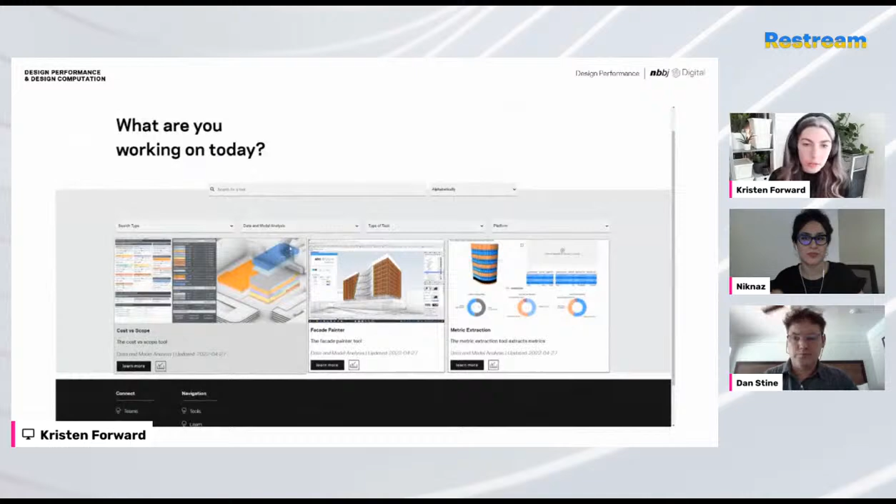So we worked with our UI/UX designer and our full stack developer to develop this new version of our toolkit. It has nice features for searching and filtering, and it's a really easy process to upload a tool, and you can tag certain things so it's categorized properly.

So we really wanted to make this fun and easy to use, a place that more than just the design computation specialists would want to go to. So we tie it to people as much as possible by giving people profiles, letting them like and comment on the tools, and also tying it back to our internal blogging system.

So we have some really cool success stories of buildings that use computation to achieve some level of performance aspect. I'll go through a few, and then I'll talk about how we're actually using computation and performance tools more often on project work. The Hangzhou Stadium is a great case study of using computation to optimize the building structure and then ultimately reduce the amount of material needed.

This work happened back when Grasshopper was just being newly adopted into practice. Computation specialists like Nathan Miller were pioneering their use on design teams. The really cool thing about this project was the cross-disciplinary aspect of the workflow.

Rhino and Grasshopper were translated into Revit, and then that was exported to AutoCAD for the engineers to run analyses, and those results were fed back into Grasshopper. This was back when we didn't have Rhino inside Revit or other really tight plugins to help us work with these workflows. So that integration between the disciplines was ultimately what enabled this ambitious structure to be optimized and ultimately realized.

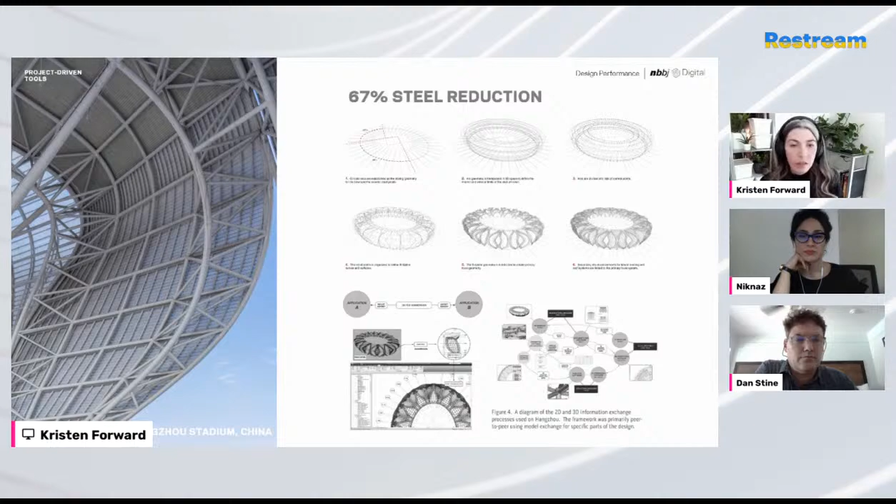This one's an example of a project that wanted to use analysis to enhance employees' experience and overall productivity. The client wanted to ensure that their employees had a really high number of spontaneous interactions with each other, which is proving to increase innovation in a company.

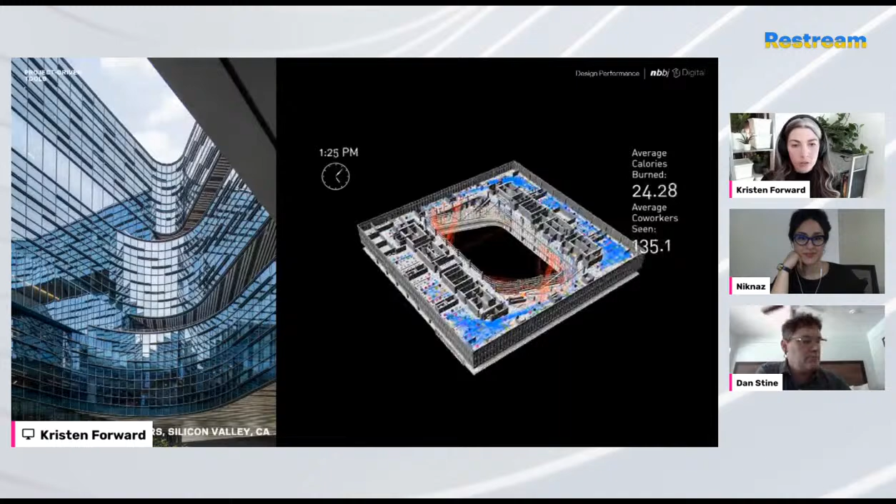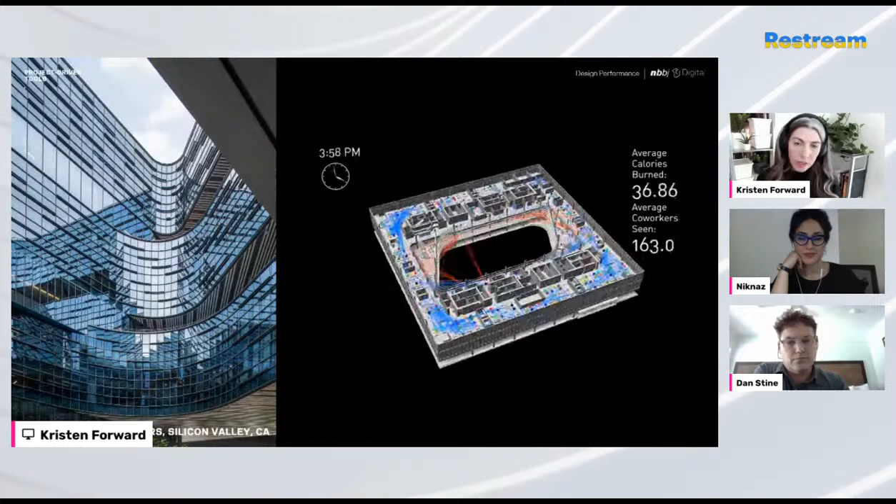So the simulation used an in-house Grasshopper plugin to study how much potential there was for visual connections between employees in a day. The blue is on the same floor, and the red lines are between different floors. By comparing multiple studies, ultimately the project's teams were able to arrive at a design that maximized its potential while also balancing other design aspects.

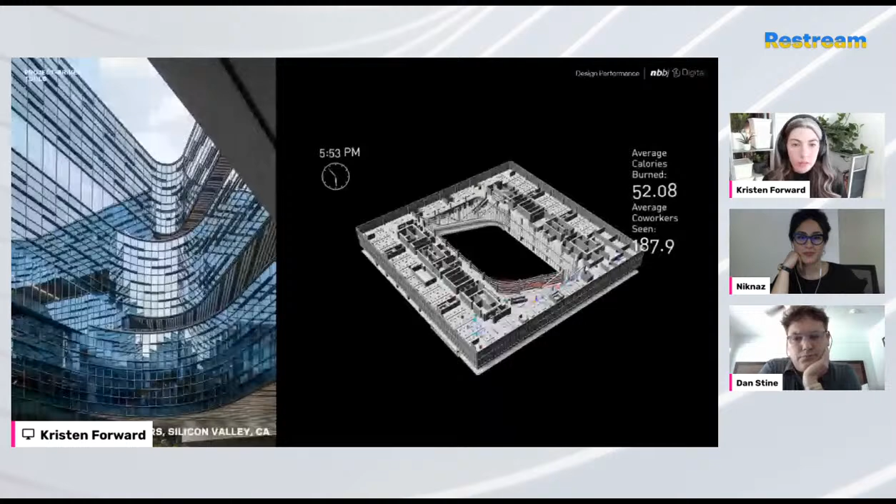The Spheres is a great example of how we can do some really complex environmental analysis to accommodate for both plants and humans. This one studied a combination of natural and indoor lighting and controls for both people and plant life. Plants inside the Spheres are from all over the world, and they have super unique requirements to thrive.

The team worked with external scientists and our internal lighting consultants to understand the calculations for all the usable light from the sun and different lighting fixtures. They made a custom tool in Grasshopper that simplified the calculation, and it allowed the lighting team to test different lighting schemes.

So I wanted to show these projects and talk a bit about them because they're certainly worth mentioning. Some of our most innovative tools and workflows have come out of designing them, but they just represent a small fraction of what we're doing at NBBJ.

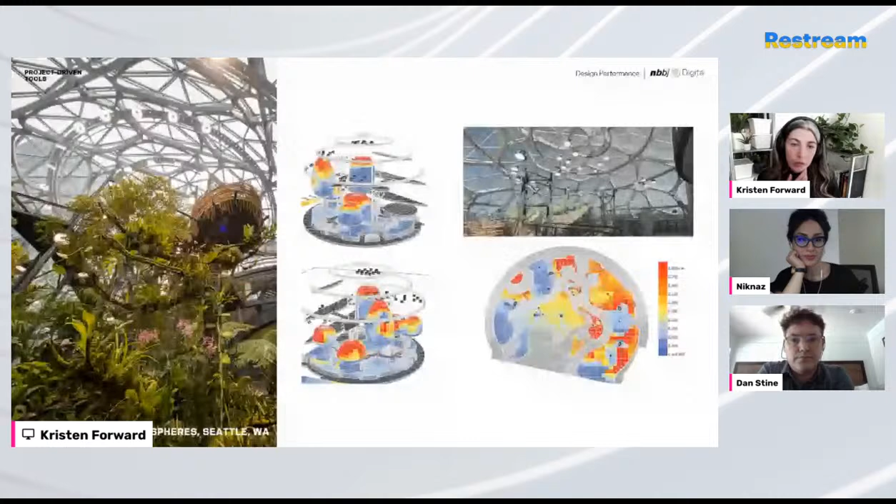They're kind of on that far end of the long tail that Daniel Davis talked about recently, meaning what we're seeing in the firm with these big projects is what the best and brightest designers and specialists have worked on. The real collective challenge in our practice lies in that fat middle, the area that's defined by more projects that have more practical design challenges and certainly more financial constraints.

Our teams are integrating performance into designs every day, and often designers are performing analyses. These are just a small snippet of examples from across the board. And they're sharing this work with the rest of the company through a number of channels, and definitely our toolkit.

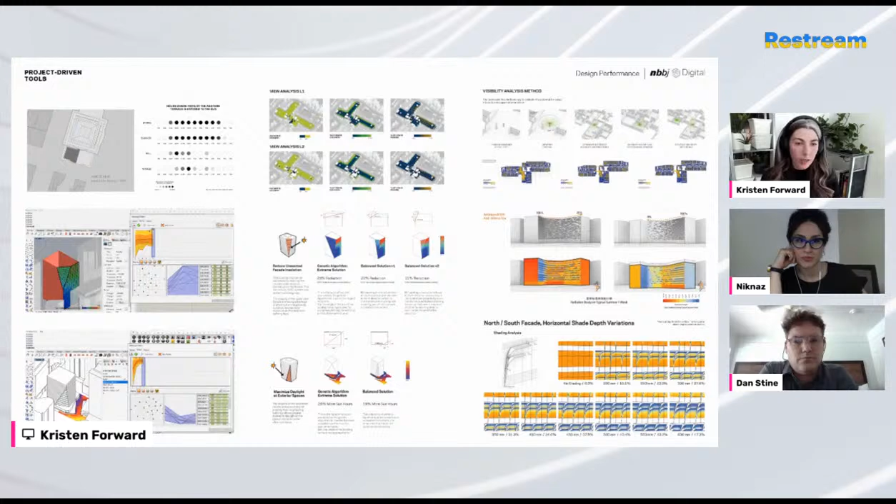And we're finding challenges in using these tools on projects, and then they're coming up with ideas and processes to make these better. So the role that I have, bridging between the computation team that's so project-embedded and the overall performance group that's really goal-oriented, is to track and gather this feedback and ideas, and then work to solve the problems at a more infrastructural and institutional level in the company.

When we think about the challenges of implementing performance tools in general, they can be categorized into three areas. The complexity of performance tools, as they tend to have really significant learning curves and they often lack seamless integration with our commonly used software.

The intricacy of interpreting analytical results can dissipate designers' abilities to adequately utilize data to make informed decisions. And then there's the knowledge gap between our performance design experts and non-experts. This will slow the progression of design actions because there's not enough data to understand the design goals, understand the metrics, and especially all the tools that are available for them.

So with these challenges in mind, we've developed a guiding approach that has both computational and strategic methods for enabling performance design in our practice. This is from the perspective of a team that leverages existing tools, creates custom tools, and also educates people on using those tools.

It starts with implementing this in work. It starts with who is implementing it. It starts with the processes that we commonly use and the projects that we're implementing performance on.

The first tier of the approach looks at accessibility and usability and the adoption of performance tools. We understand there are really diverse sets of needs across a large swath of stakeholders on design teams, so we've got to shift our thinking towards democratizing the capabilities beyond just specialists and approach these tools with accessibility, interface design, and control as top priorities.

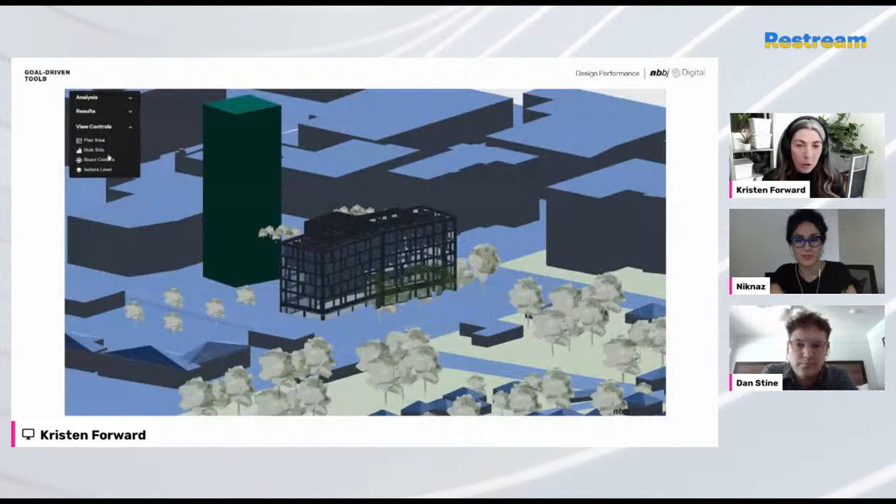So one of the tools is our view analysis tool. This tool is hosted on the web, but it integrates into our software that we use commonly, like Rhino and Revit. The UI/UX design of this was really important for the development. It's showing pretty easy to understand graphics. The idea behind it is that it tries to make this stuff more simple, and it also lets you export the data in a more consumable sense.

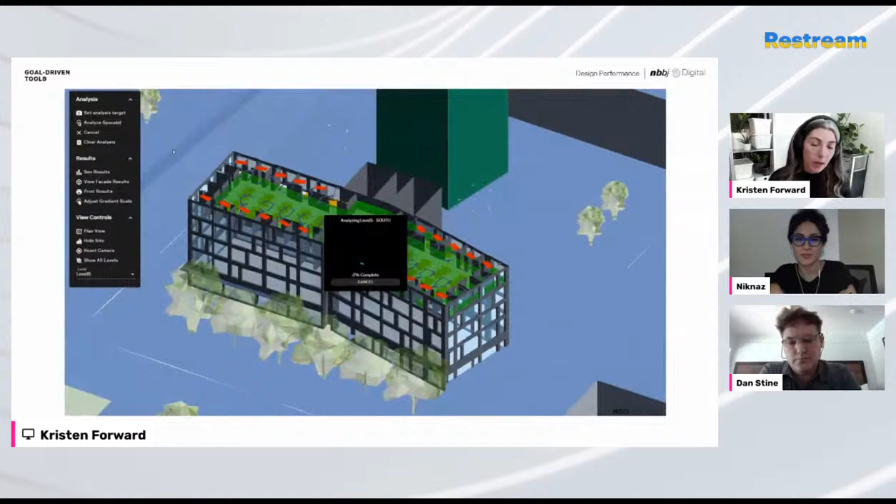So it links to evaluations like LEED and WELL, and it also has graphic talking points for what the data is showing. Our daylighting tool is like this too. It has custom templates that we provide when you export the information, so it'll empower designers to more competently discuss their outcomes.

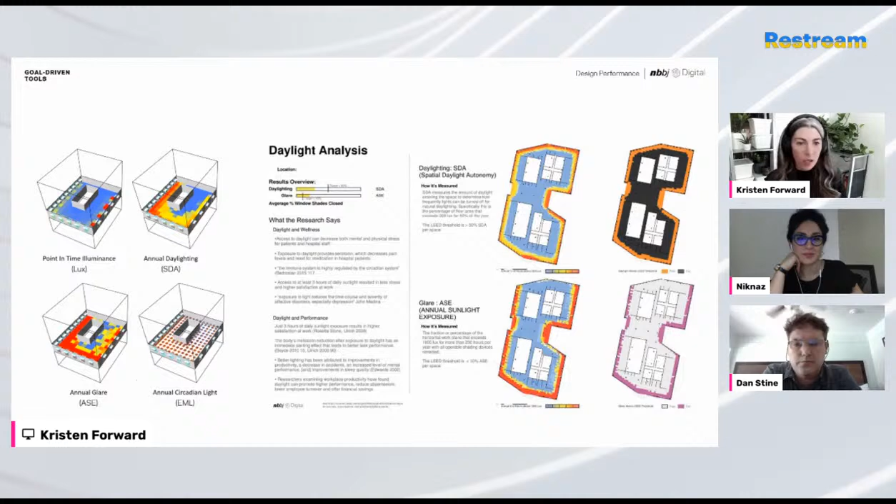This is a tool that's part of the Applied Science Toolkit as well. It's based in Rhino and Grasshopper. We know that most of our designers work in there, so we wanted to create something that just plugs right into their workflow. This tool specifically is a wrapper on the Climate Studio plugins and provides both a parametric option as well as something that lets you import layers from Rhino to run different analyses related to daylight.

That's a summary of some of the tools and workflows, but I want to talk really quickly about what we're planning to go on to from here. The innovation at NBBJ is really driven by the individuals in the company, and what we focus on is mainly a product of the interest of our team members. That said, we try to facilitate the innovation by providing opportunities for us to come together and brainstorm new ideas.

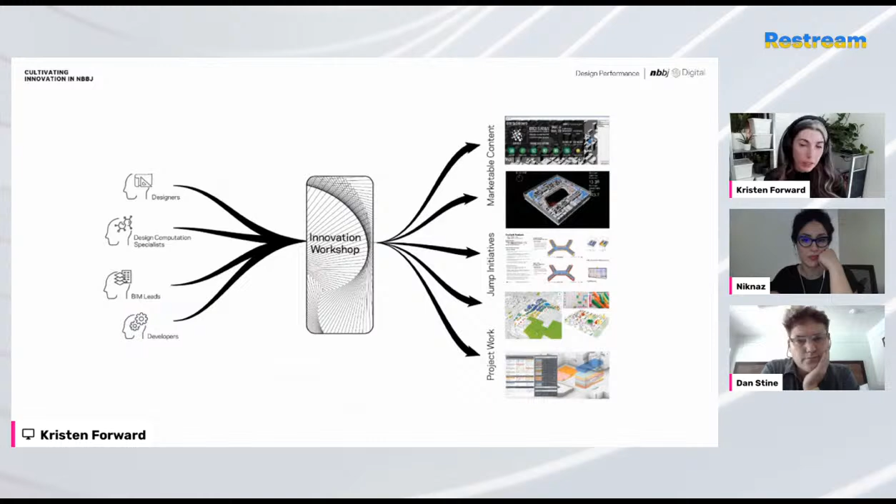In the most celebratory sense, we do this in the form of hackathons. They're open to anyone who's interested or has an idea and the availability to take three days out of their life and quickly develop a proof of concept. Some of our coolest new tools have come from these events.

A lot of them focus on performance design too. So ideas range from mobile apps that give users access to indoor environmental data in the workplace, to the innovation of our in-house training travel distance analysis plugin, to exploring visual acuity in virtual reality, and also a tool that asks how productive a space can be by measuring an equal balance between prospect and refuge areas.

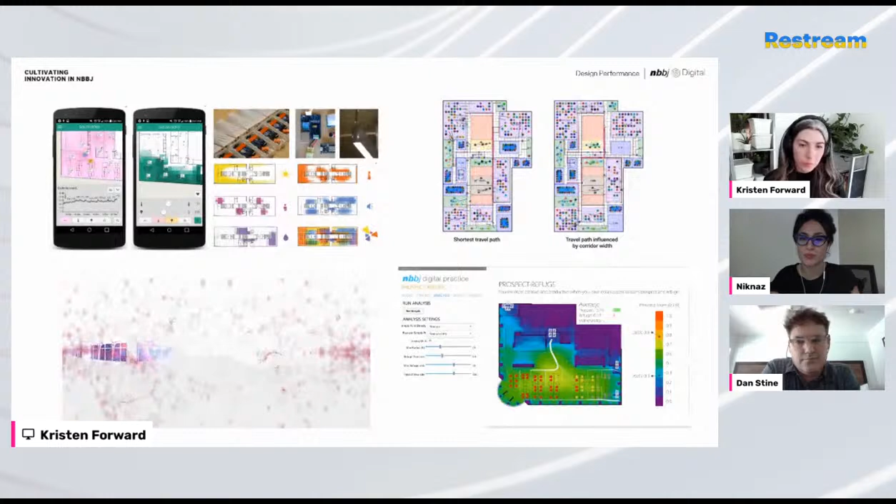We also try to have a presence in the industry, like contributing to advancing innovation in external hackathons and conferences. A handful of our team members were focused on automating analysis model extraction at last year's AEC-Tech hackathon. They were developing a proof of concept for extracting geometry at any design phase and then having it ready for performance analysis, so the idea was to tighten the design-performance feedback cycle.

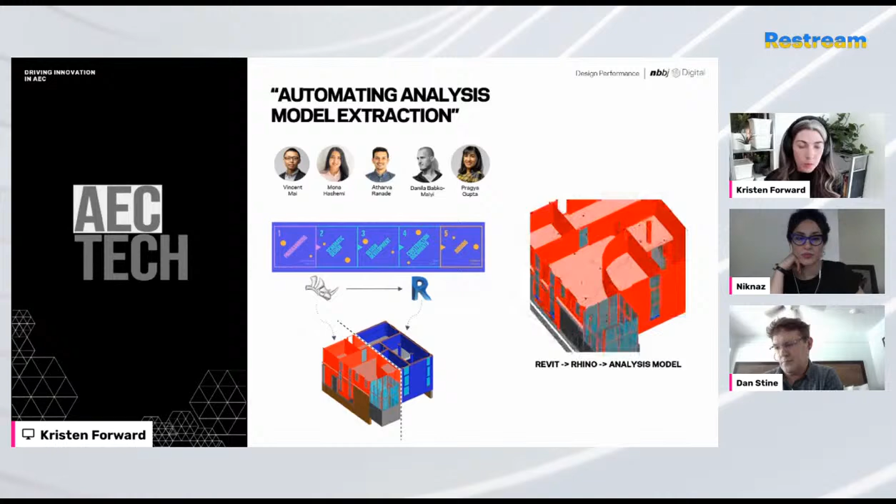Apart from contributing to collective gatherings, events, or discussions in the industry, we want to contribute in more of a form of technology. We're working on an external release of the Zero Guide tool, and the idea is to provide more useful tools that others can benefit from, and hope that they help foster communication and have an impact in enabling carbon-conscious design work in the industry. I hope personally that we can do more of these, prepare more tools for external release in the future. Thanks for listening.

Thank you so much, Kristen. This was amazing, so extremely useful tools. Just a quick question, and then the Q&A section will be at the end.

So these tools are all in-house, and then all the offices, all NBBJ offices, have access to use them. Is that right? Just internally? Yeah, a lot of the tools are ones that we custom make ourselves. I mean, we're definitely using tools that exist in the industry as well, but we're, as a team, kind of vetting what is the most useful.

Anyone is really welcome to use what they find the most useful, but as a whole, we're either using tools that exist and creating wrappers on them to make them more relative to our workflows, or we're creating our own custom tools that we don't see in the industry that we think are most relevant to us.

That's amazing that you have resources and people to work on these tools. It is, yeah, that's great. Awesome, thank you so much.

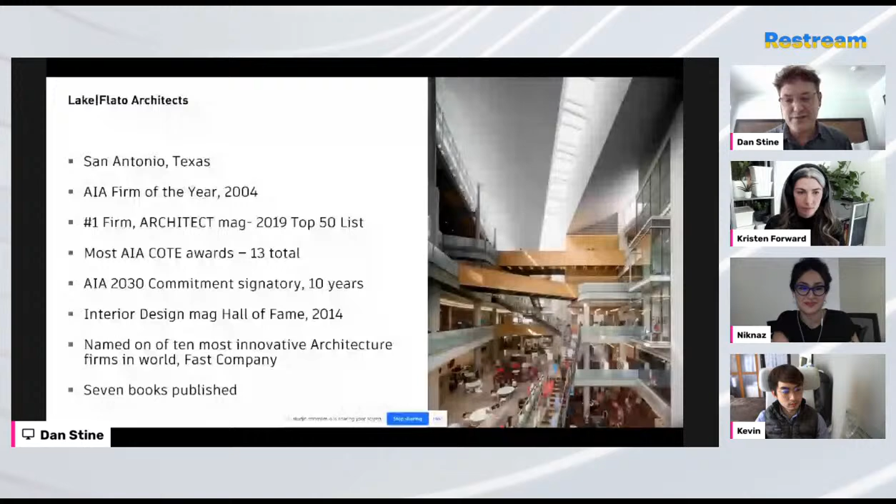We have 5 studios in our office. About half of our work is national and the rest regional in Texas.

And then, like NBBJ, we also signed this COP26 communique. Part of being deliberate about design technology and building performance in general is having an organization and a strategy, and communicating it throughout the firm.

We have a design performance action plan, or also known as a sustainability action plan, that helps guide and influence project-related decisions. And then when it comes to design technology, my title is Director of Design Technology, and it's actually a new position that's been created.

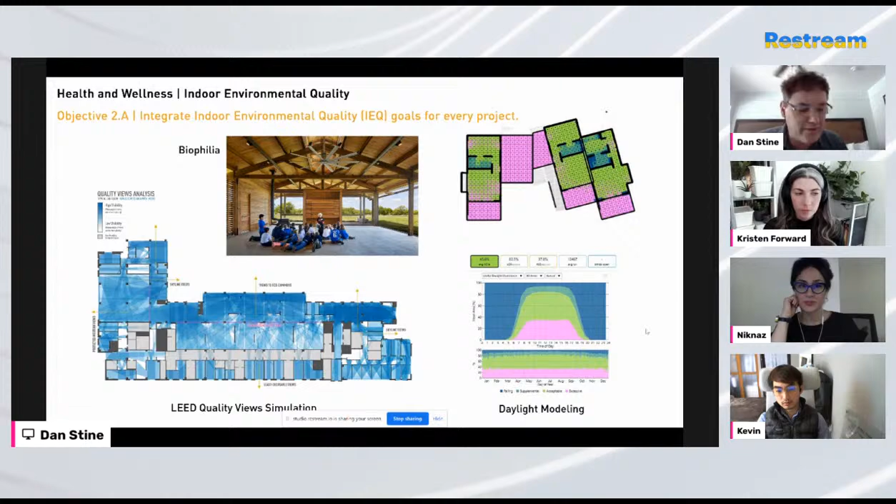Climate Studio, for example, has a great Revit plugin now where you can export a Revit model directly into Rhino and do some really great things with Climate Studio.

Another workflow we use to maintain that single source of truth, and also allow design teams to do some of their own analysis, is for early energy modeling: we use Autodesk Revit and Autodesk Insight, which is a cloud-based tool that uses DOE 2.2.

It's ASHRAE 140 validated. It creates perimeter and core thermal zoning as prescribed in ASHRAE 90.1 Appendix G.

On the right, you can see Autodesk has this great tool where they worked with NREL, and you can get results similar to NREL's PV Watts website in less than 15 minutes on any project in Revit. So I always say, even if a project isn't necessarily calling for PV, we should be running this number and sharing it with the client.

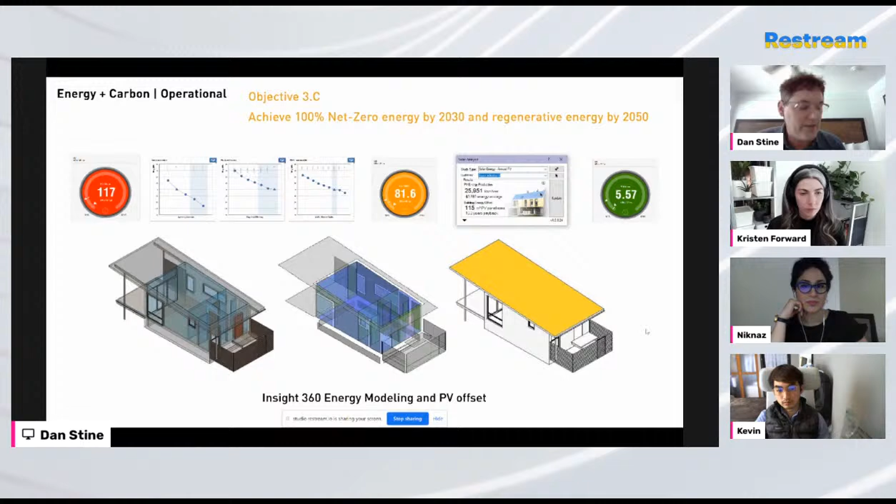The AIA Code of Ethics, of course, talks about members taking time to communicate and educate environmental issues with the client.

We also, again, this single source of truth, we're using Tally, which is part of Building Transparency now, and EC3, to do embodied carbon analysis and study global warming potential between different wall types, different infrastructures. We have a great report from our internal research group that is a summation of a report on embodied carbon on our website. If you go to LakeFlato.com and the investigations page, you'll see a really interesting document there.

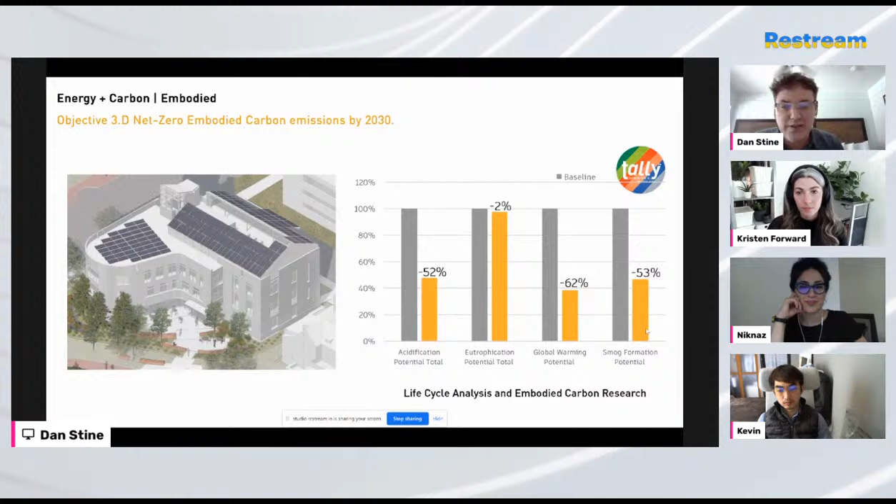Recently, I worked with one of our mechanical engineers in Austin, Texas, on a project that's in San Antonio, and basically we're studying the point of diminishing returns in a hot, humid climate for roof and wall thermal mass and thermal resistance values. And then we also took that same project and dropped it into 4 other climate zones.

Again, about being deliberate and developing workflows, we have this workflow on operational energy. We have another one on embodied carbon as well, how we would do each of these tasks at different phases during a project. We also have one for daylighting analysis.

I won't read through all that for you, but you can see we start early and try to do it often. That's focusing on passive strategies early on before we start getting to active strategies and then ultimately renewables that would layer on top of that to try and get to zero as much as possible.

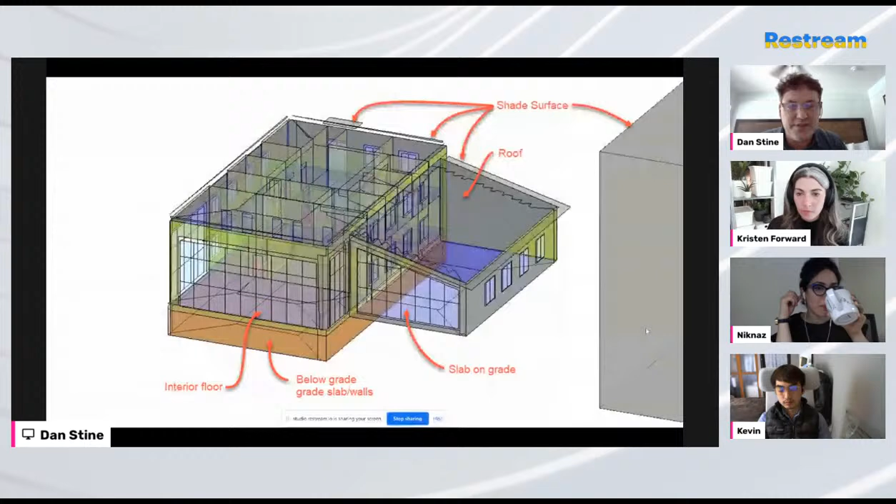This is just an example of the sophistication of the workflow when you have a Revit model, and the sloped roof section on the right is actually just massing. When you create an energy analysis model, it'll automatically convert all the planes into the correct surfaces. So that mass on the right, its bottom plane turned into a slab on grade for the energy analysis model, and the roof turned into a roof, but the overhangs turned into shade surfaces.

Just for validation purposes, we're always looking at comparing tools and workflows. I wrote a blog post on the Lake Flato website, Lake Flato's blog called The Dog Run, comparing Insight results with Climate Studio's ability to do energy modeling. Of course, Energy Plus and DOE 2.2 are very well vetted energy modeling engines. So same inputs should yield the same results, and that's what the blog post shows. They're both great tools, and they both produce accurate results.

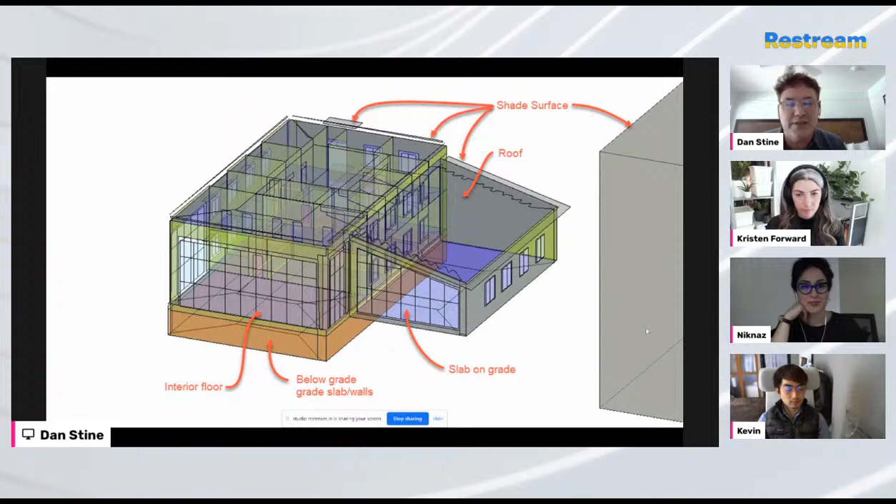But you can also take the early energy modeling workflow that involves Insight and DOE 2.2 and take it a bit further in our workflow within Revit before the mechanical engineer gets involved, or even potentially some overlap.

Here's a current project that we're working on in Montana. It's part of a ski resort, a multi-use facility with a gym and a retail area and a restaurant, and we're able to, within Revit, develop an accurate envelope with proper thermal resistance and thermal capacity or thermal mass, accurate internal loads, reasonably accurate HVAC using Revit's new system analysis feature.

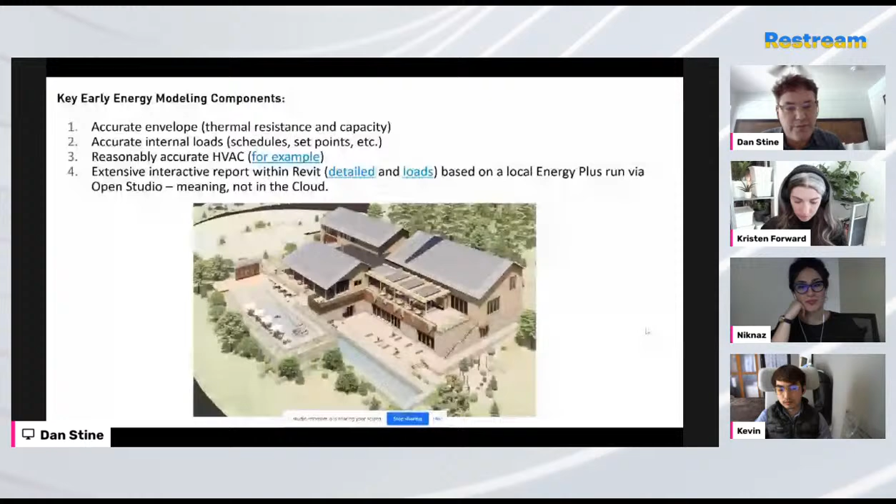So we can define a VRF system, a dedicated outside air system. The gym was defined as a rooftop unit system. And then it creates an extensive report that you can view directly in Revit with an EUI and all kinds of other metrics that are really quite interesting, psychrometric charts. Here's an example just to show you those.

Concepts: a highly accurate envelope, internal loads, and HVAC systems. So the envelope here is in the lower left where you see it says detailed. Within Revit's materials, you can actually develop an accurate wall material, one of the layers within a wall.

The little example on the right is actually from one of our passive house projects. This is a wall type developed in WUFI Passive, and this is just showing that you can develop the same exact level of detail in Revit. And of course, if you were to change the thickness of the material, the total thermal resistance and thermal mass change, which thermal mass is also really important and often overlooked in some of the competing tools. The little green arrows show the same R value of a 100.

This is actually more of an extreme example, like when I was talking about the point of diminishing returns, the R100 is pretty high. And then in the upper right, when we're working early in the process, as I mentioned, a massing element, when it turns into the energy analytical model, the surfaces' properties, thermal resistance and thermal capacity, are defined by dialog box selections, not Revit materials.

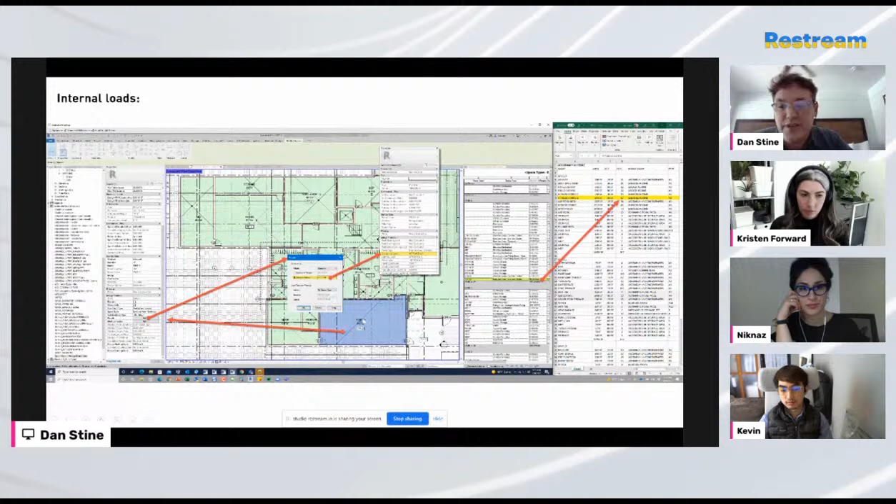So here's one other look at developing the internal loads. When you select a space, in addition to having a space type - this one over here on the right, the space type is set to exercise area - then per that previous dialog, it has all its own internal loads. But then there's some overrides that you can do if needed for this one space.

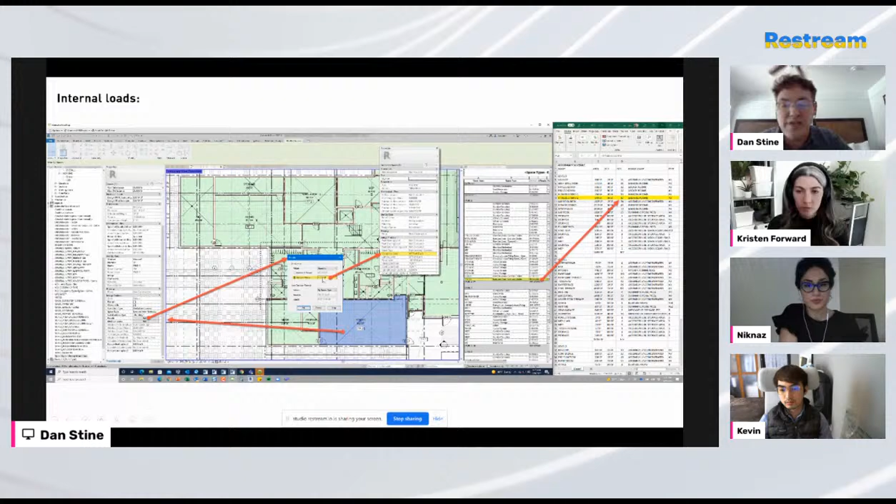So here we plugged in the area per person. Same thing a lot of us architects do on Revit rooms, creating all kinds of parameters to track this. For Revit spaces, this idea of area per person is already baked in.

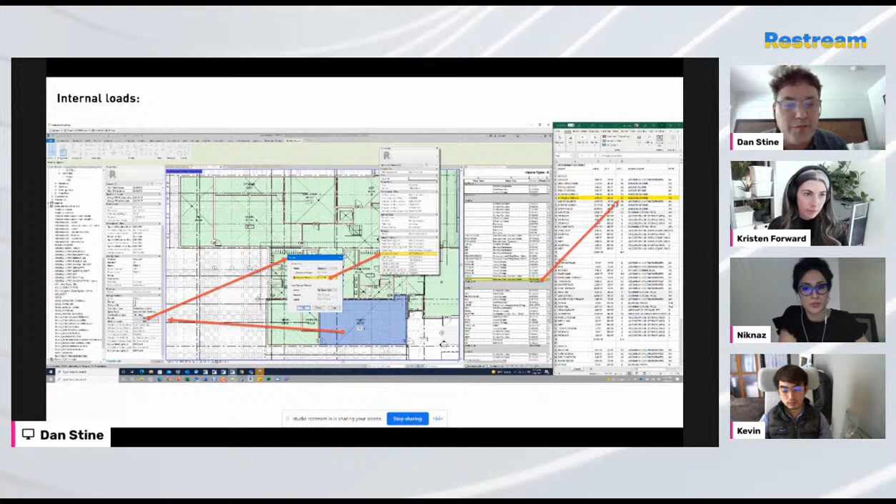And then when you create the energy analysis model, that then contains the calculated load - so the occupant load of 40,775 BTUs per hour. And then we can create a space schedule in Revit that lists the occupant load and compare that with the spreadsheet that the architect's been working on separately to see that the load, which is obviously an important thing in calculating internal loads, the latent people heat gains, for example.

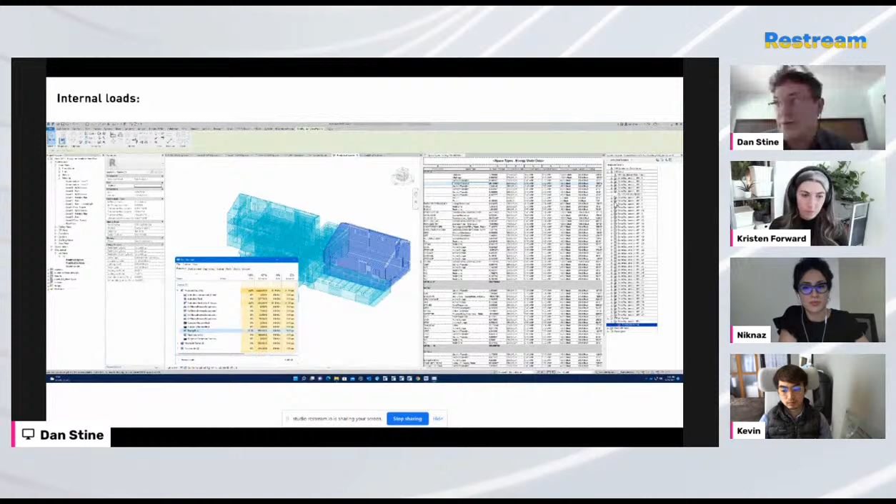Here's an example of within Revit, when you're using the systems analysis tool locally on your local computer's CPU and hard drive, you can do an EnergyPlus run initiated through OpenStudio. So you can do anything in OpenStudio. It's like unto Grasshopper to Rhino, Dynamo to Revit, OpenStudio to EnergyPlus. You can create these measures and scripts that can swap out the entire HVAC system for a radiant floor system or a geothermal system.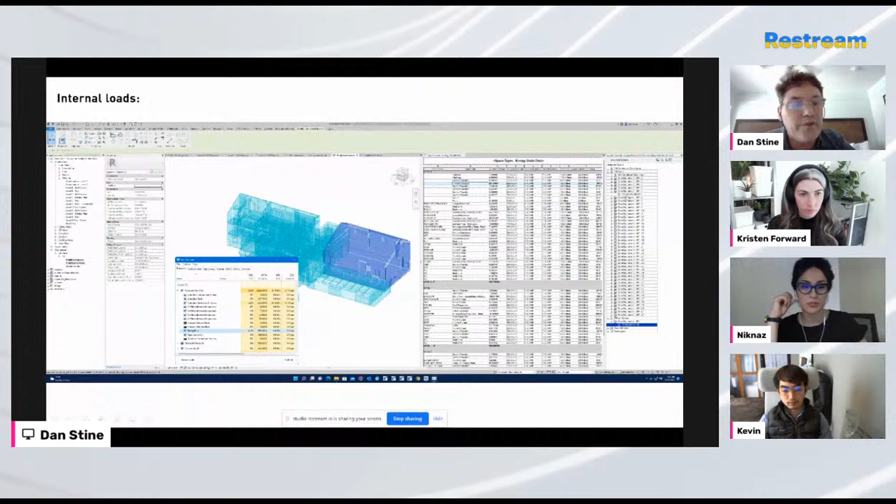On the right, the system browser shows all the spaces, and you can see there's a VRF system, and there's the fitness studio. So the architect's room name and number come through to the spaces when you use the space renaming tool.